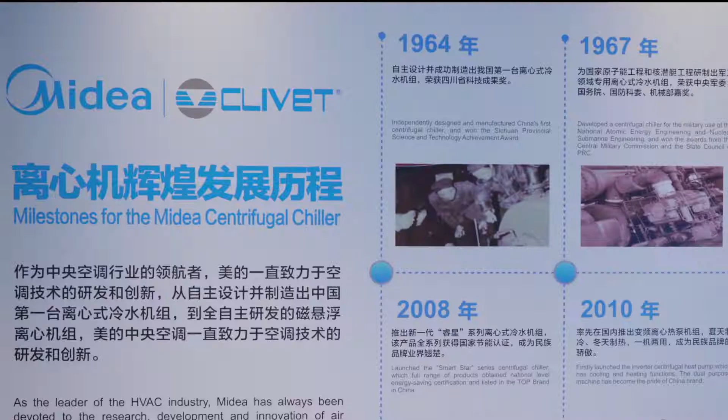In 2004, together with Chongqing General Industrial Group Co. Limited, Midea established Midea Chongqing Chiller Factory, thus fully entered the large tonnage central air conditioning industry. Midea Chongqing Chiller Factory has a military industrial background, with more than 50 years experience in R&D and in manufacturing centrifugal chillers. It has carried out technical cooperation with Hitachi in Japan in the 80s and York in the United States in the 90s, integrating advanced centrifugal technology domestic and international.

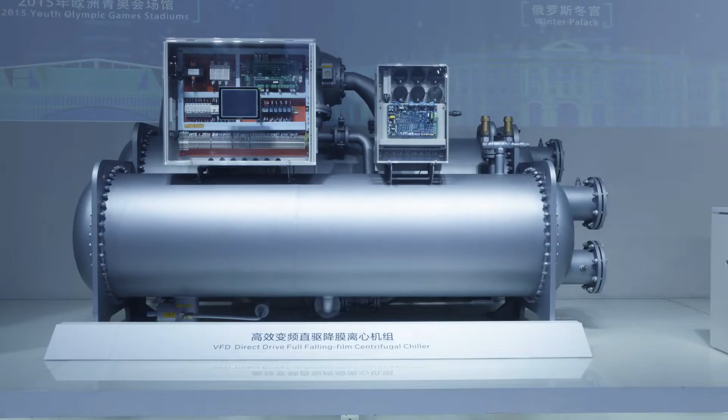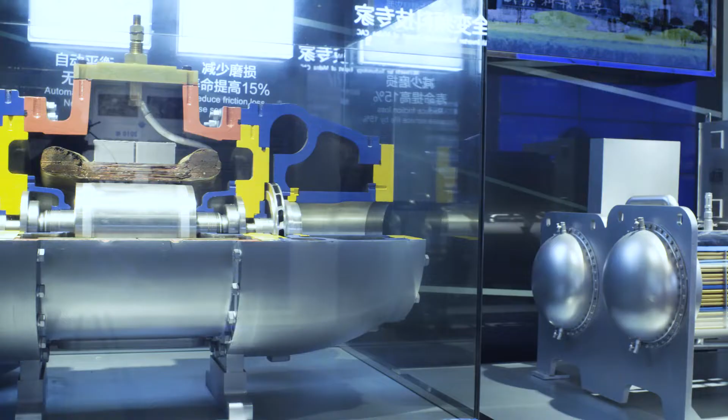After the establishment of Midea Chongqing Chiller Factory, Midea invested a lot of capital and resources in large tonnage chillers. From technology introduction to independent innovation, Midea continues to break through the HVAC industrial technical barriers. In 2013, Midea launched ultra-high efficiency 2-stage centrifugal chillers, leading the COP of centrifugal chillers into the 7.0 era. In 2015, Midea launched Inverter Direct Drive Centrifugal Chiller, breaking through the energy efficiency barrier of the small cooling section. In 2016, Midea acquired the famous Italian chiller manufacturer Clivet, thus expanded its chiller bases to global.

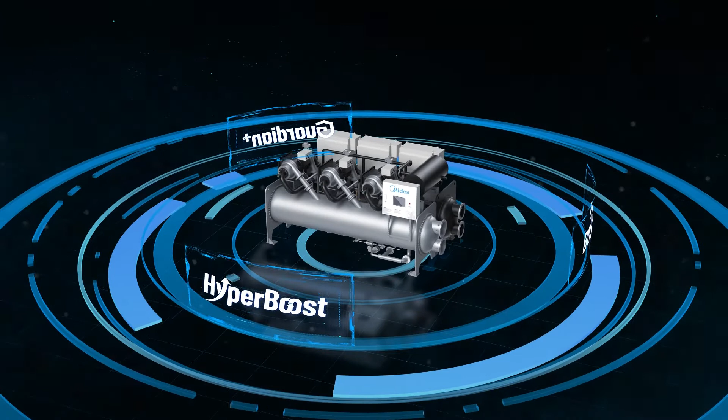In 2019, Midea launched a fully self-developed magnetic centrifugal chiller, breaking the history of core technology monopolized by foreign HVAC manufacturers.

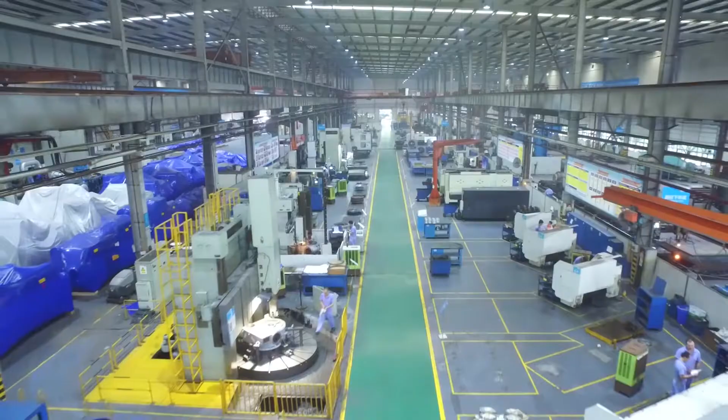So far, Midea Chongqing Chiller Factory is one of the largest chiller production bases in China, with about 800 employees. There are 5 workshops covering an area of 200,000 square meters, which mainly produces centrifugal and screw chillers, and also used as warehouse. Midea insists on independent R&D and manufacturing of core components. It masters core technologies and creates cost-effective products for users.

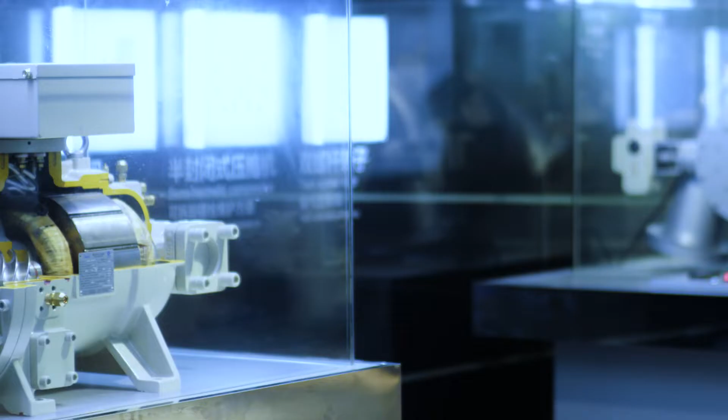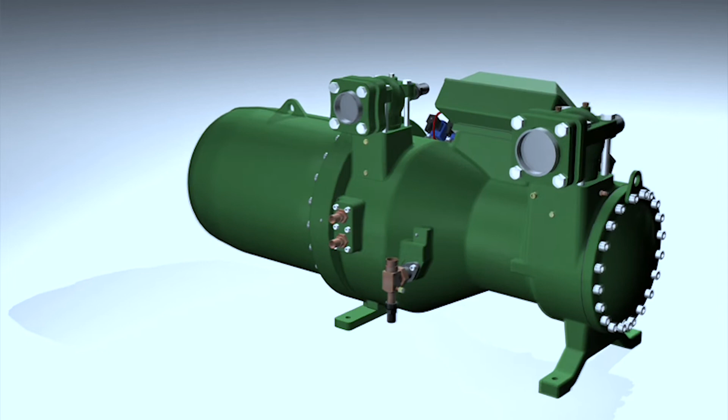The twin-rotor screw compressors increase energy efficiency by 15 to 20% compared to the single-rotor screw compressors. The compressor is equipped with a 3-stage oil separator, featuring high separation efficiency, small pressure drop, and a low oil throwing rate.

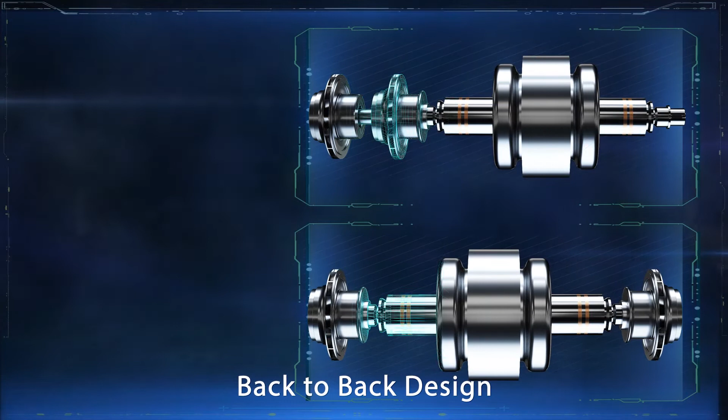One of the highlights of Midea's self-developed inverter direct drive centrifugal compressor and the magnetic centrifugal compressor is the structural design. The 2-stage impeller arranges according to Midea's unique horizontally back-to-back design and is opposed horizontally, which reduces axial force by more than 90% compared to the traditional tandem design, with longer bearing life, better stability, and higher compressor efficiency.

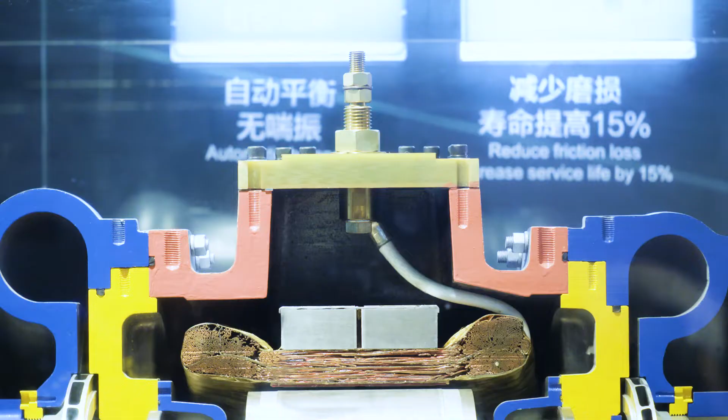With the dual control of operating frequency and the pre-rotation inlet guide vane, it achieves a wider operating range of the compressor. The inverter direct drive centrifugal chiller adopts direct drive technology, eliminating the increasing gear of traditional compressor. With a compact structure and stable operation, it reduces mechanical loss by 4%. No gear high-speed motion, which reduces the noise of the chiller by 5 to 10 dBA.

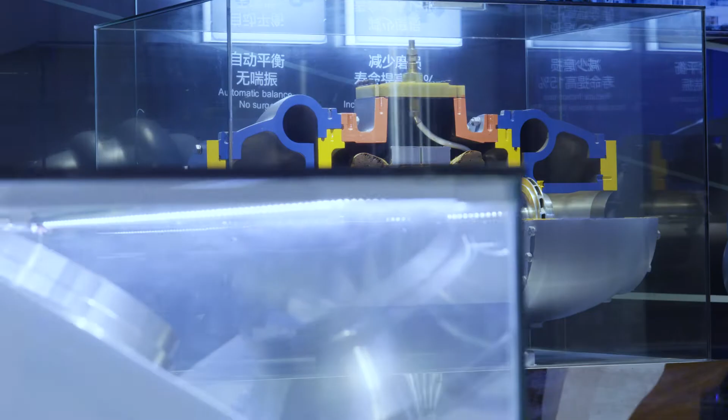Meanwhile, the accuracy of the operation frequency control is up to 0.1 Hz, which can precisely manage the refrigerant flow and improve the control accuracy of water temperature. It also combines with the built-in optimization algorithm, keeping the compressor running efficiently.

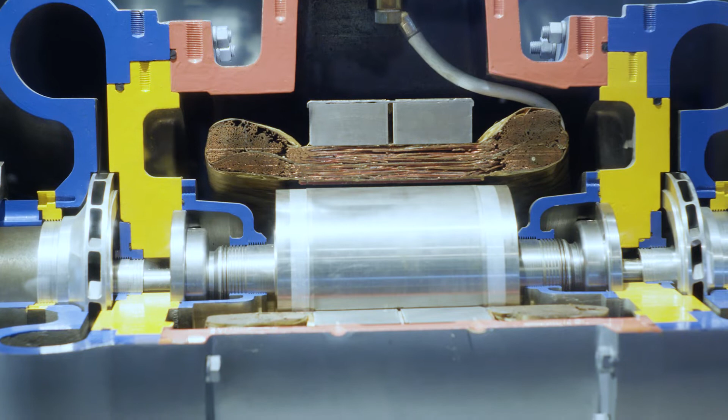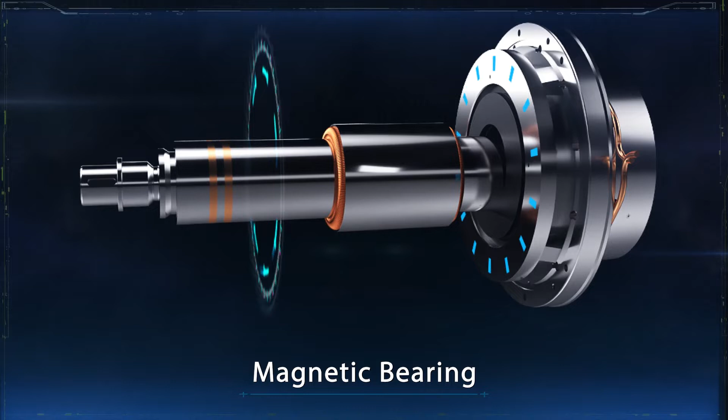The frequency control of the magnetic centrifugal chiller uses an advanced vector control algorithm combined with Midea's self-developed permanent magnet synchronous motor, thus achieving more efficient speed control, making energy regulation more accurate and operating more efficient.

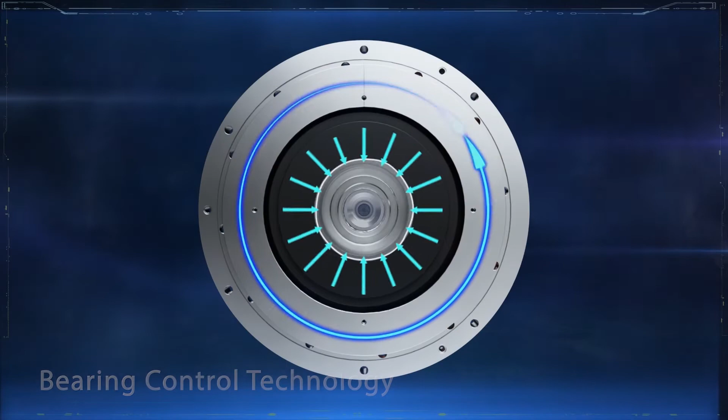Most of the traditional evaporators are flooded type, with a large refrigerant charge and limited evaporation efficiency. Midea's pioneered full-falling film evaporation technology saves about 40% of the refrigerant compared to the traditional flooded type, which makes it advantageous in both energy saving and environmental protection.

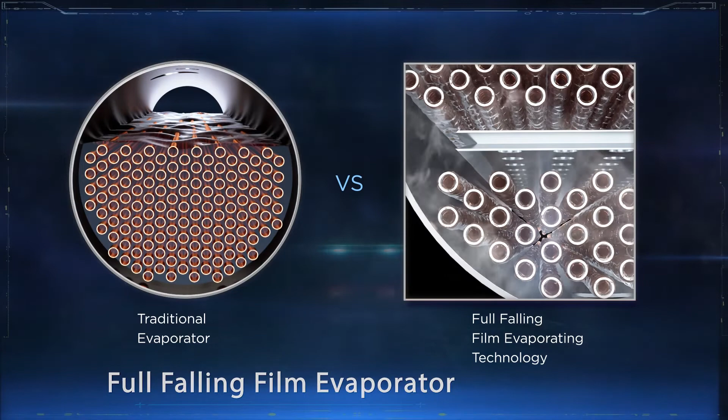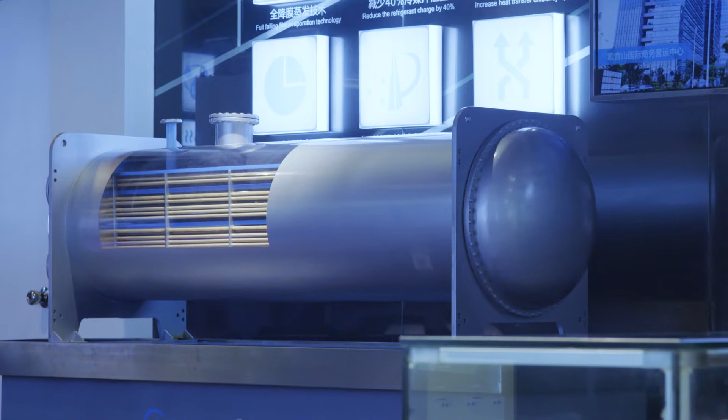Refrigerant is sprayed to form a liquid film on the surface of the high-efficiency heat exchanger tube in the full-falling film evaporator. The heat transfer efficiency is greatly enhanced by about 30% compared with the traditional full liquid type.

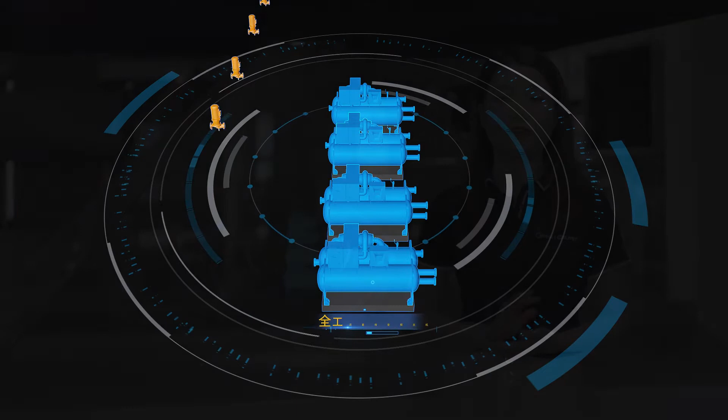This holographic projection shows the application of Midea's technical solution for a high-efficiency machine room at Tianhe Park Metro Station in Guangzhou, China, which is the largest metro station in Asia and is a transfer station for 3 lines. In this project, Midea applied 4 high-efficiency inverter direct drive centrifugal chillers, 4 inverter chilled water pumps, 4 inverter cooling water pumps, and 4 cooling towers, and modular AHUs, FCUs with big temperature difference and low resistance.

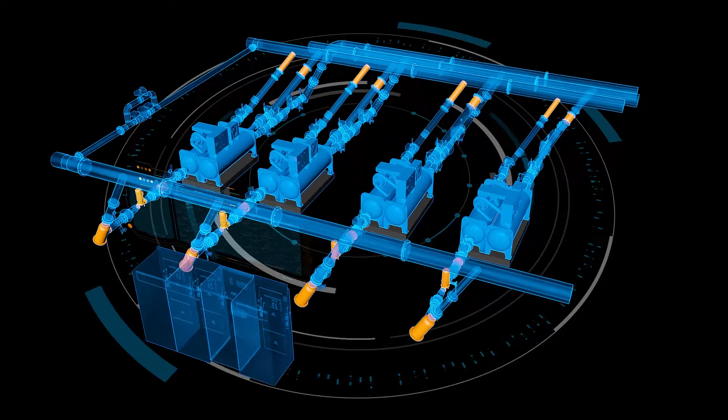Midea HVAC engineers also optimized all the water pipeline connections to reduce pipeline resistance by increasing pipe diameters and using low-resistance valve components. The project uses Midea BMS for all-round intelligent management of the chillers, terminals, and control system. This project has raised the energy efficiency level of China's rail transportation environmental monitoring system to an unprecedented new level, significantly improving the whole life cycle operation efficiency and driving technical progress across the industry, with a comprehensive energy efficiency of over 6.0 throughout the year.

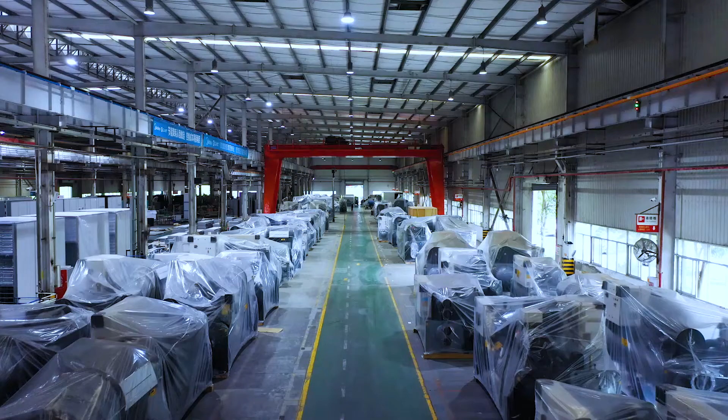Midea has more than 50 years of experience in developing and manufacturing centrifugal chillers. In 2021, there will be more than 1,000 centrifugal chillers produced by Midea to provide comfortable environments for different projects around the world.

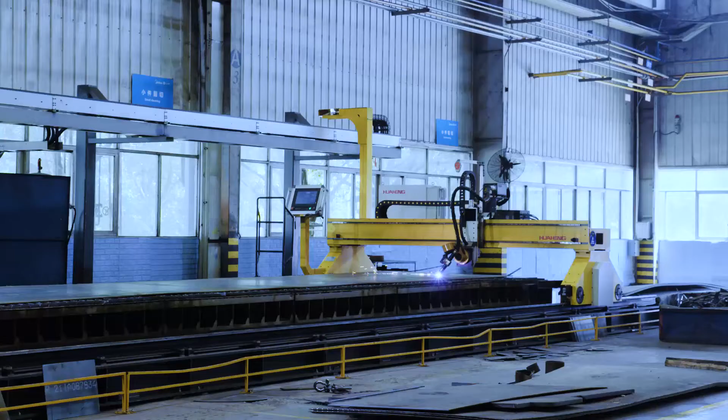This process will be automatically identified by the equipment according to the program instructions, and the cutting accuracy will be as close as 1 millimeter.

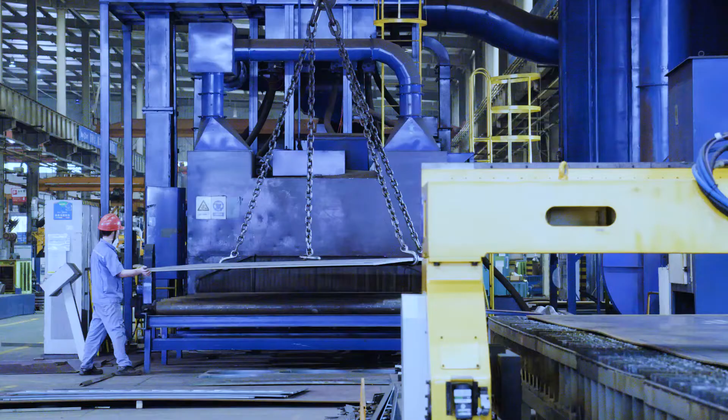This is needed to carry out shot blasting treatment on the steel plates. In order to obtain better welding quality, the high-speed, repeated impact of shot blasting is used to clean the stains and rust on the surface of the steel plates.

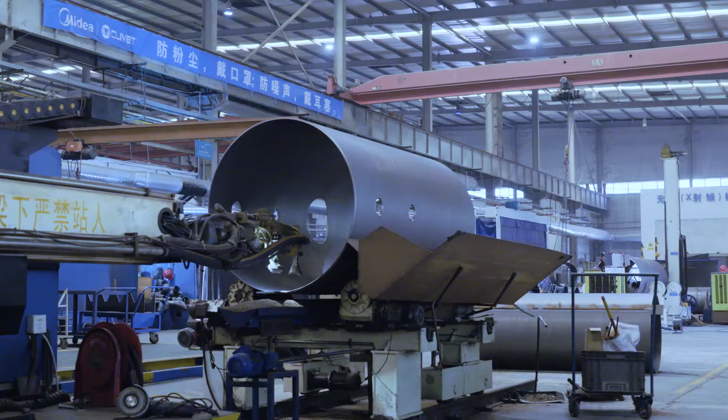After shot blasting, the steel plate will then be rolled into a cylinder under the great pressure of the plate rolling machine. This ordinary steel plate begins to now have the rudiment of a pressure vessel. It will be further formed in the automatic submerged arc welding machine. All welds will be non-destructively inspected to ensure weld quality.

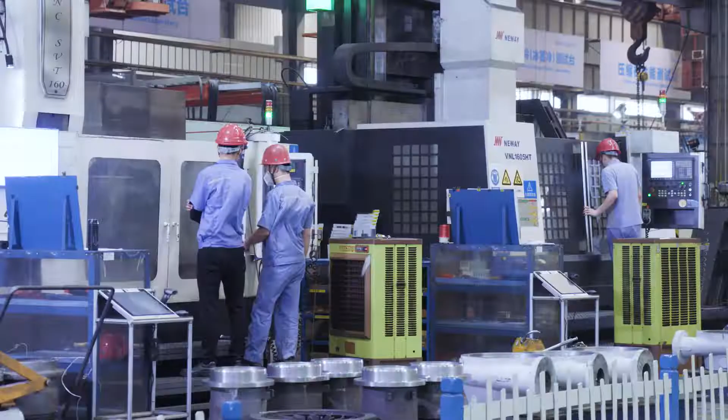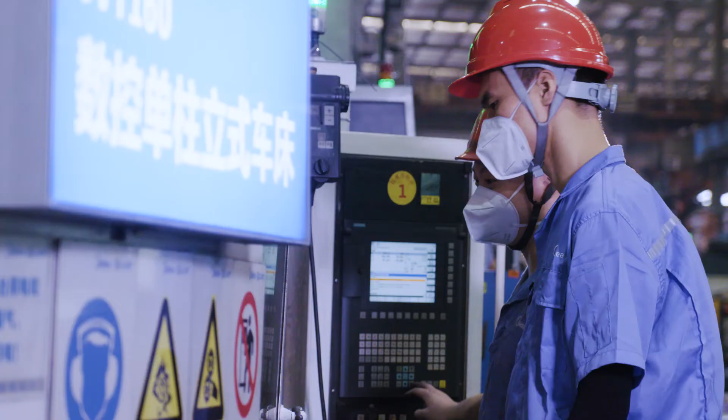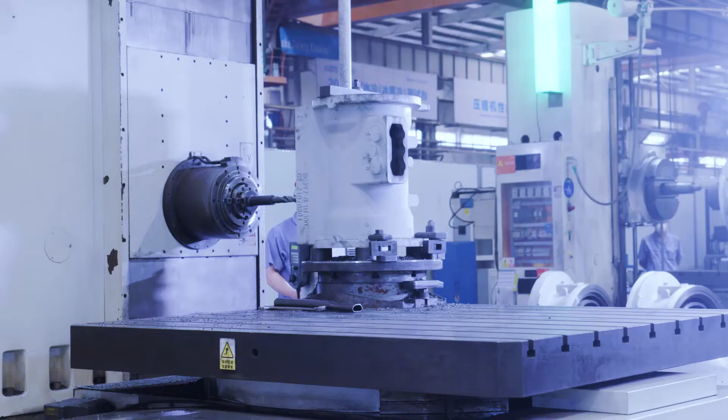The grade of tolerance could reach IT04. The surface roughness can reach 0.8, in order to guarantee the assembly accuracy. We have adopted the advanced coordinate measuring machine from the German company Zeiss to measure and analyze the size and shape of key components like gears, motor shafts, impellers, bearings, and sealing parts. The measurement accuracy can reach 0.001 mm, which ensures the manufacturing of high-quality products.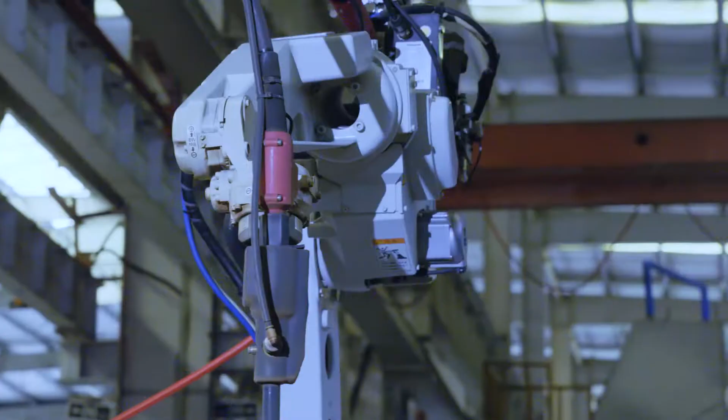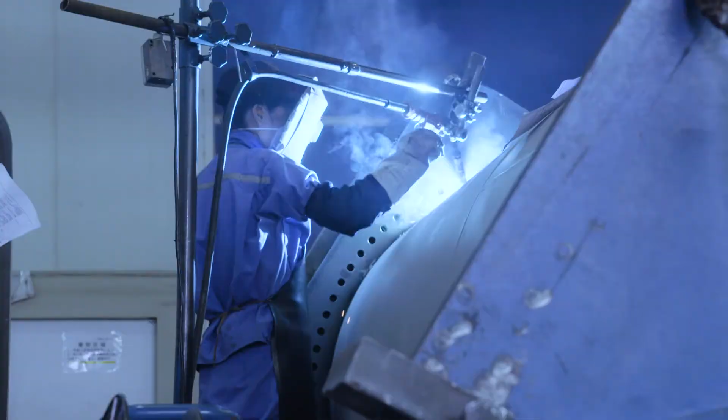Then the welded pressure cylinder will be transferred here. First, the inner parts, like the falling film distributor or supporting parts, will be installed, and the two ends will be sealed with a tube sheet.

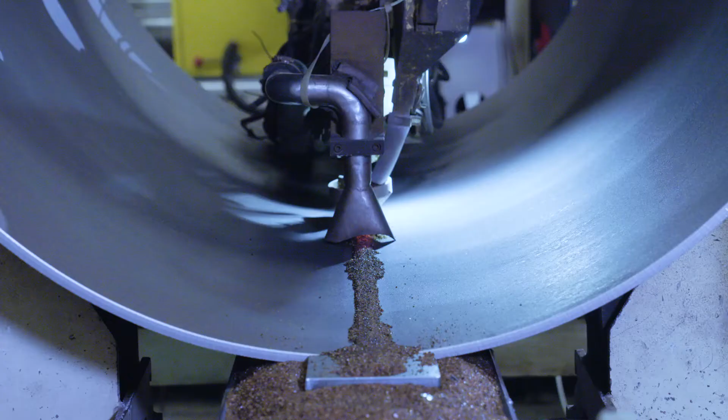A large amount of heat needs to be dissipated during the welding process to prevent thermal deformation. So the welding tooling invented by Midea engineers has been adopted. Such small but very useful innovations can be found everywhere in our plant.

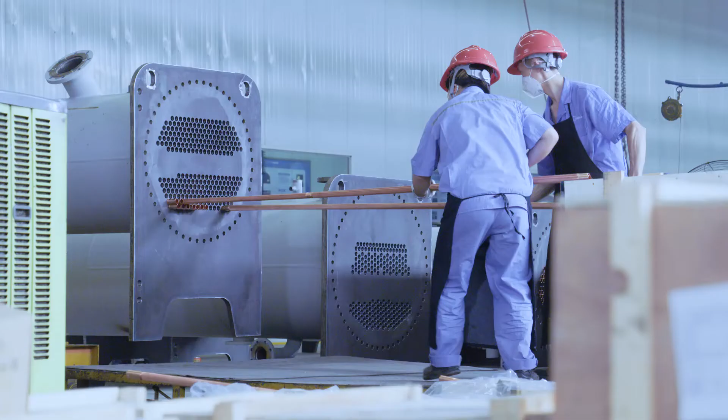Next, the copper tubes will be installed and then expanded at both ends to ensure a reliable interference fit between the copper tubes and the tube sheets.

After the vessels are manufactured, water pressure testing will be conducted at a higher pressure to ensure there's no vessel leakage. The testing pressure value varies with the pressure vessel model. Take the ASME code for example: this vessel will be tested under 1.43 times the design pressure.

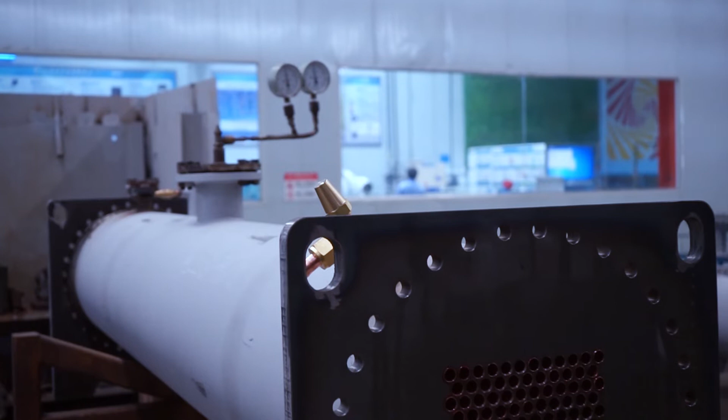As for the compressor, the pressure-bearing parts will go through a hydrostatic test with 1.5 times the design pressure. After assembly, the whole compressor will be tested again with 1.2 times design pressure to ensure its airtightness.

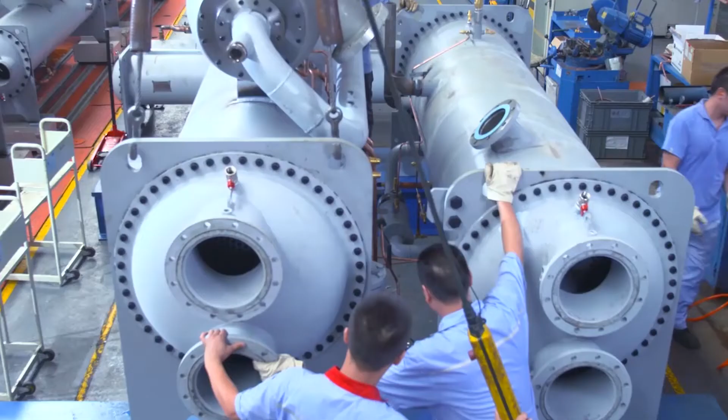On the final assembly line, the vessels, compressors, and pipelines will be assembled together. All the outsourced key components of the chillers are supplied by leading suppliers in the HVAC industry, like Danfoss, Siemens, and Schneider.

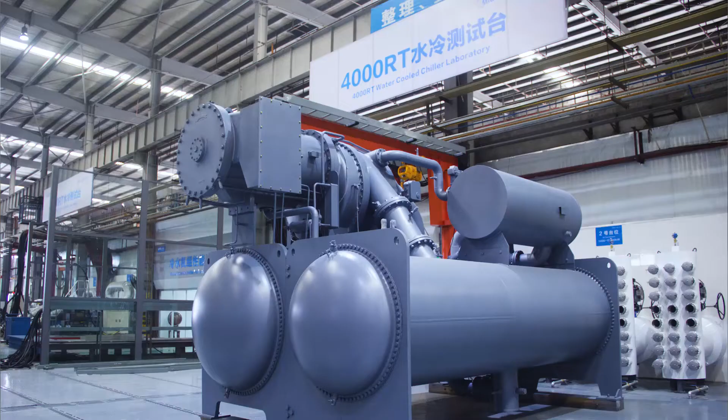This chiller laboratory, with a testing capacity of up to 4,000 RT, adopts industry-leading measurement and control technologies. It can be used for super large tonnage chillers.

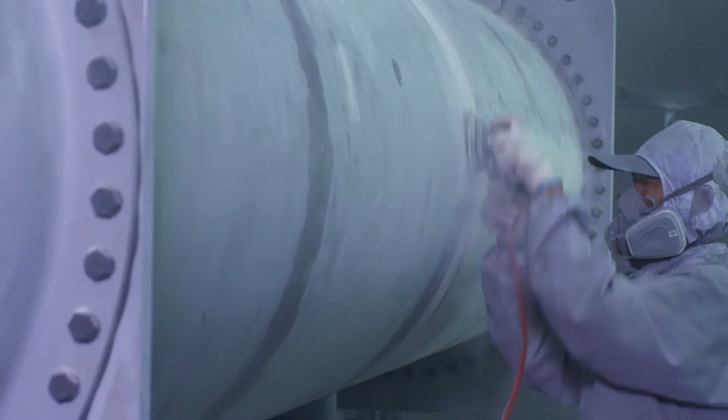After strict quality inspection and testing, the chiller will be painted. The evaporator, suction pipe, and other low-temperature parts will be insulated. Then the centrifugal chiller is ready for shipment and delivered to the customer.

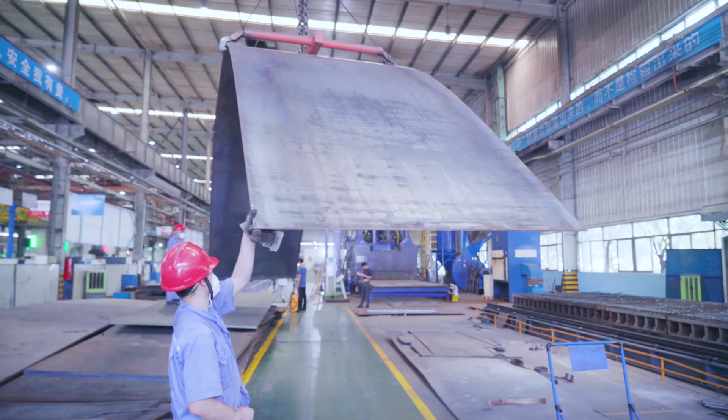Now we are in the workshop which specializes in producing screw chillers, both water-cooled and air-cooled. It is composed of 4 parts: blanking cold working area, container assembly area, unit assembly area, and thermal insulation packaging area. The annual capacity of screw chillers is 4,500.

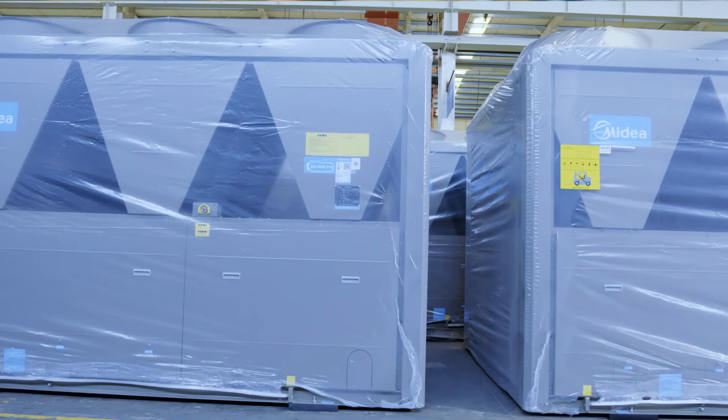At present, Midea has become a leading brand of screw chillers. Whether water-cooled or air-cooled, the sales volume has been ranked first among Chinese brands for many years. Screw chillers are widely used because of their unique characteristics. The global market volume of screw chillers is over 50,000 units every year.

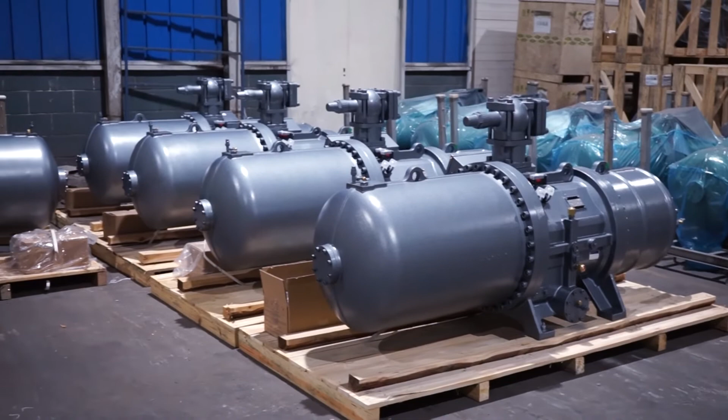Let's look around the production process of water-cooled screw chillers first. Here is the inventory area of screw compressors. These compressors are specifically supplied to Midea based on Midea's design requirements, and are 100% inspected before they are used.

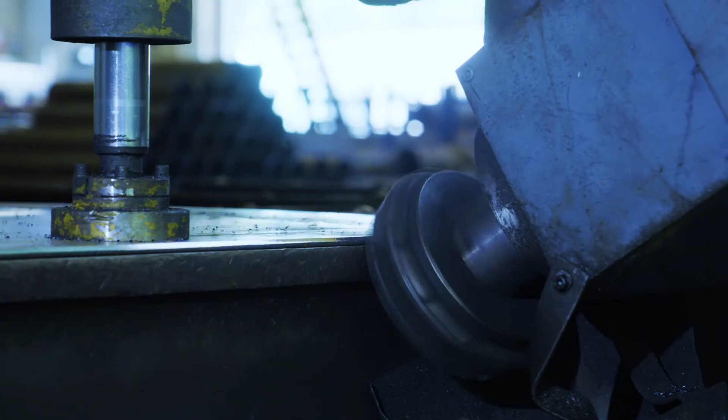Making a screw chiller starts from cutting the steel plates with a plasma cutter according to its specific vessel size. It is needed to carry out shot blasting treatment on the steel plates.

In order to obtain better welding quality, the high-speed repeated impact of shot blasting is used to clean the stains and rust on the surface of the steel plates. After shot blasting, the steel plates will be rolled into a cylinder under the great pressure of the plate rolling machine. This ordinary steel plate begins to have the rudiment of the pressure vessel.

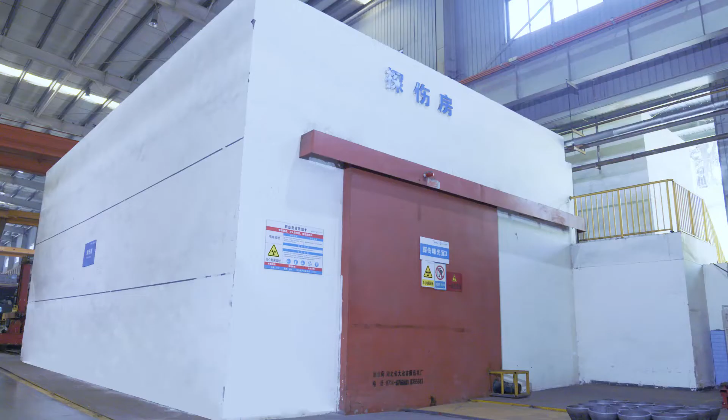The fixed support ensures that the shell will not deform due to thermal expansion or cold contraction during welding. The rudiment of pressure cooler will be further formed in the automatic submerged arc welding machine. Then all these coolers will be X-ray inspected to make sure each cooler will be qualified.

Painting is necessary to protect the shell from corrosion. The thickness of the painting must meet the requirements of the related standards.

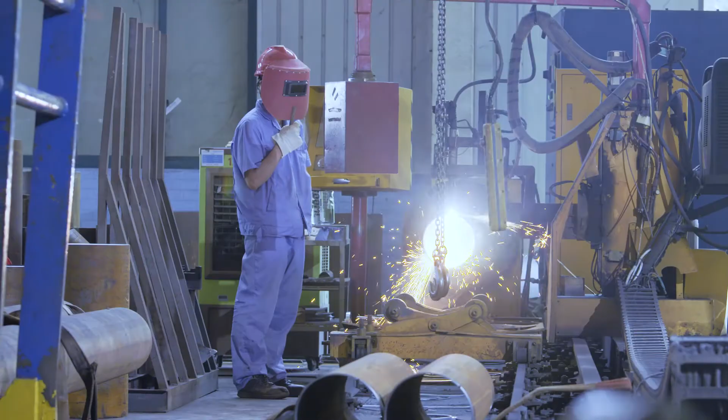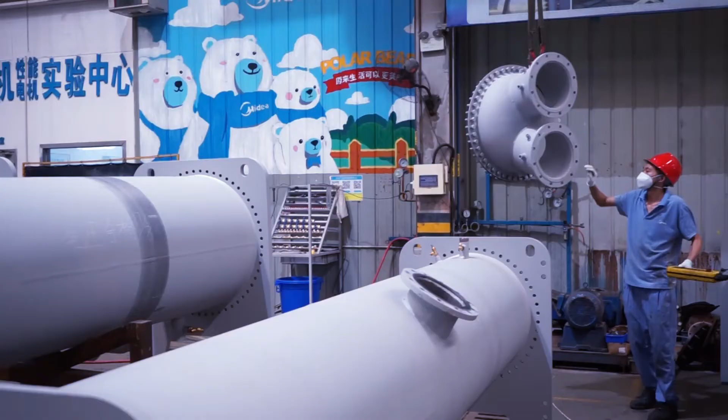The tube support plate is to enforce the strength of the tubes in the vessels. The tubes are then cut to different sizes and await the next process. The vessel and other parts are all coming together now. Special copper tubes are inserted and the baffle is completed. End plates are installed with one side being closed and the other with a cell head attached.

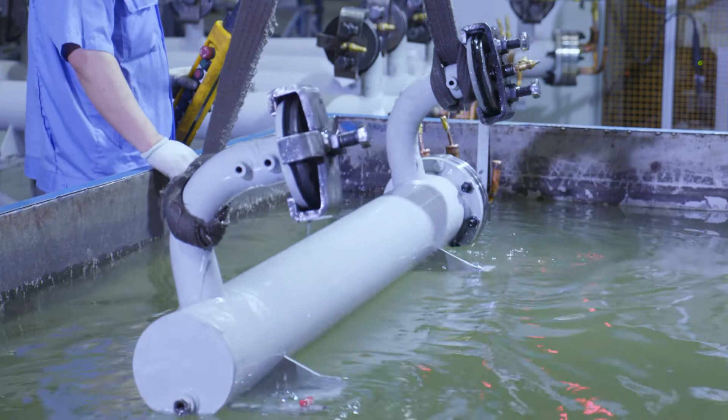After the coolers are manufactured, a pressure test will be conducted at a higher pressure to ensure there is no leakage. The value of testing pressure varies with the cooler model. Take the ASME standard for example: the coolers will be tested under 1.43 times of the design pressure.

As for the compressor, the pressure bearing parts will go through a hydrostatic test with 1.5 times of design pressure. After the assembly, the whole compressor will be tested again with 1.2 times design pressure to ensure its air tightness.

The evaporator and condenser are then bolted together. Copper tubing is installed and is in place, forming an airtight fit, which is tested by inserting nitrogen and checked with the nitrogen sniffer for leaks.

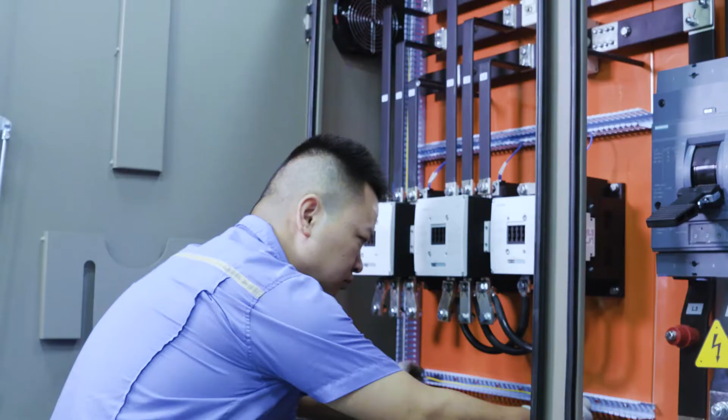Here is the assembly of the electrical control box. The PCB is made by Midea, with the other key components, like the contactor and the relay, outsourced from ABB, Schneider, or Siemens. Now let's come to the final assembly line.

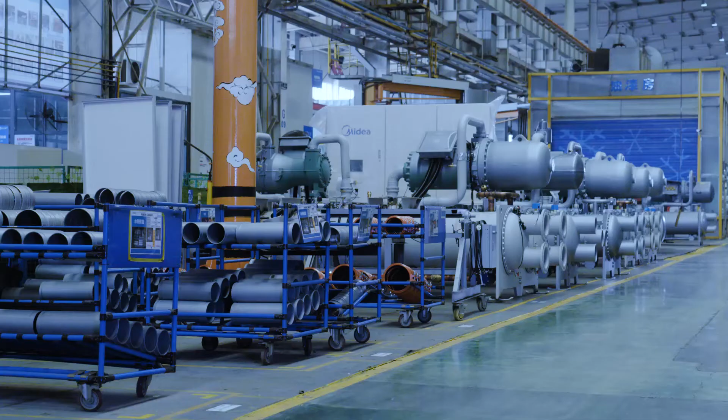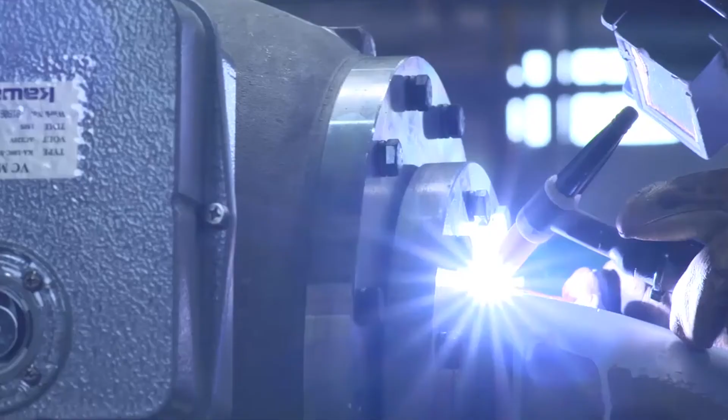The compressor is installed. The flange and the discharge pipes are fabricated and welded into place. Copper pipes connect the evaporator, the condenser, sensors, valves, and power cables are wired to the control box.

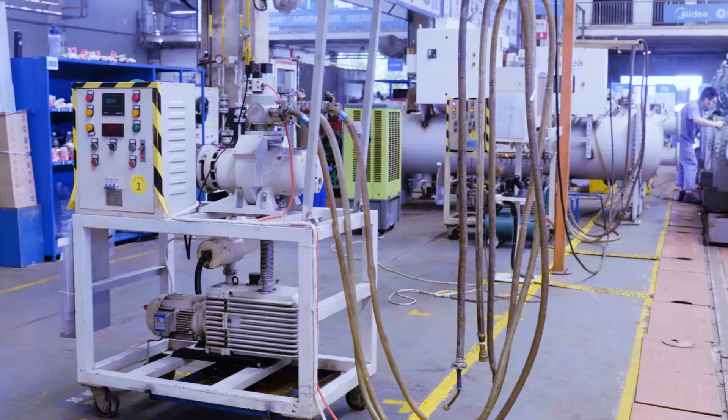After the assembly is finished, we will carry out the first leak detection of the whole chiller. The tester will fill nitrogen of 1.5 megapascal to use the high precision leak detector to detect each welding point and the flange to ensure there is no leakage.

Then the refrigerant will be charged and the halogen gas leak test will be carried out to ensure the leakage value is less than 2 grams per year.

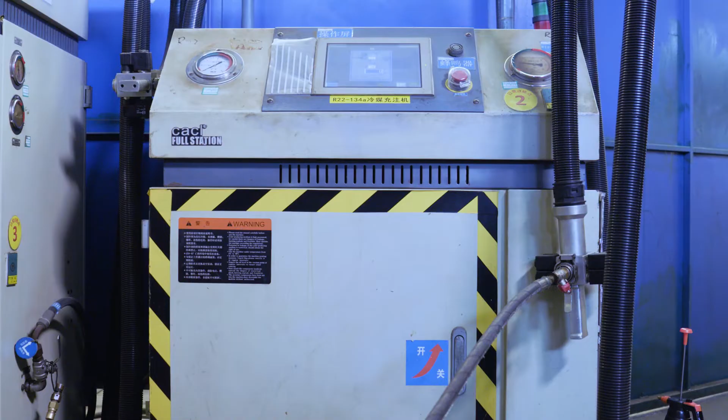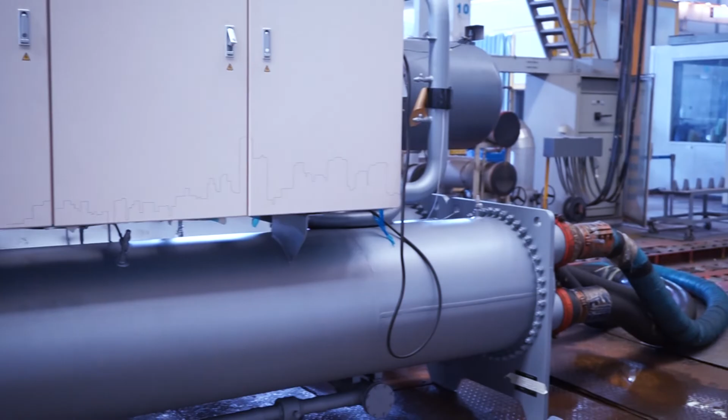Next, the unit comes to online lab, which is AHRI certified. It can simulate different working conditions based on client demands. Testing data of each unit will be recorded into a database, which can be traced by a QR code.

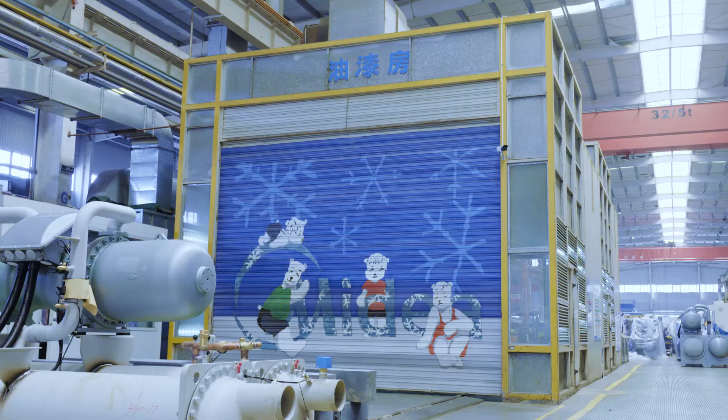The unit will then be cleaned, dried, and painted. The last step is the installation. Now, the unit is ready for shipment.

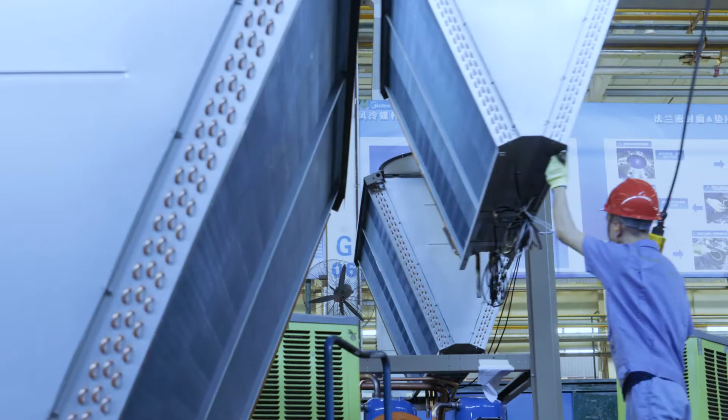Let's see how Midea makes air-cooled screw chillers. In fact, the main difference between air-cooled screw chillers and water-cooled screw chillers is the condenser. As the condenser uses air to cool the refrigerant, at the same capacity, the size of the air-cooled chiller will be much bigger than the water-cooled chiller.

Here's the start of how we make the air-cooled screw chiller. We can see how the coil is made. These special copper pipes will put these aluminum foils together.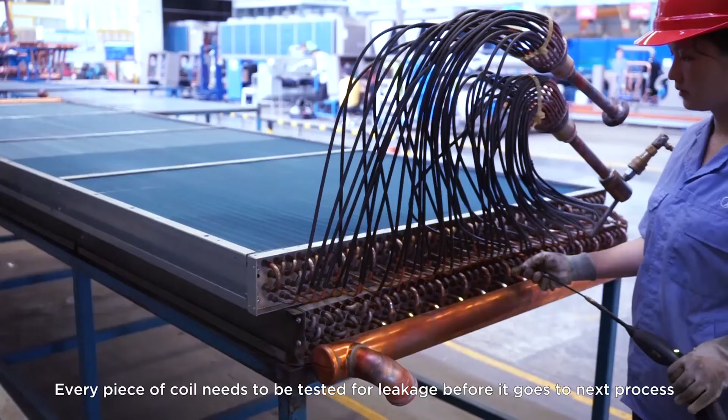Now these pieces of coil are welded together to form a big heat exchanger. The last step is to assemble the fan. Then the condenser is ready.

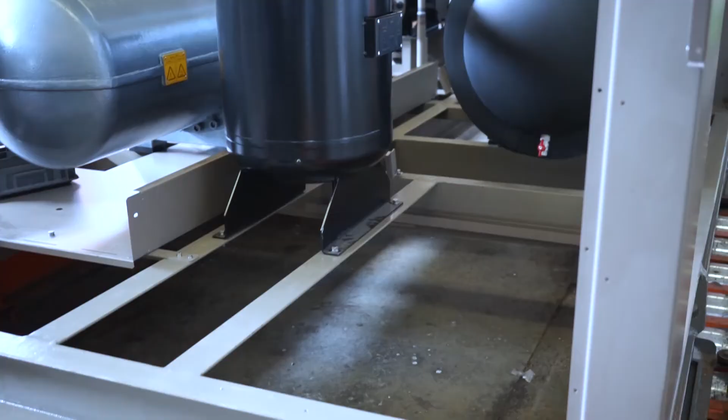The whole assembly process of an air-cooled screw chiller is the same as a water-cooled screw chiller.

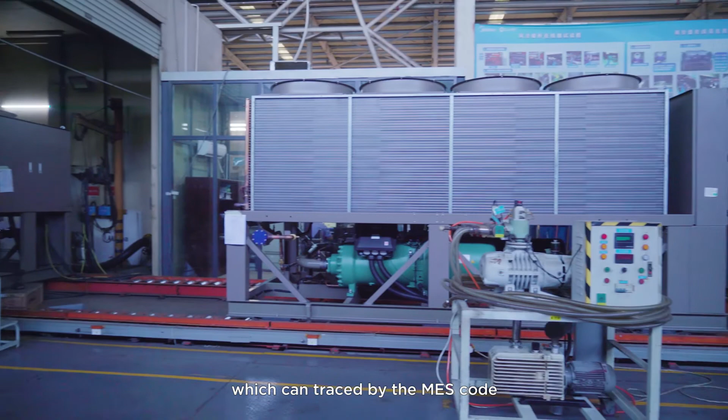Now the air chiller is ready for shipment.

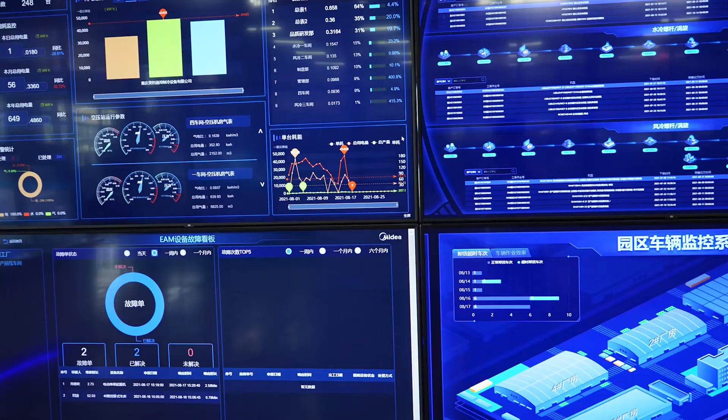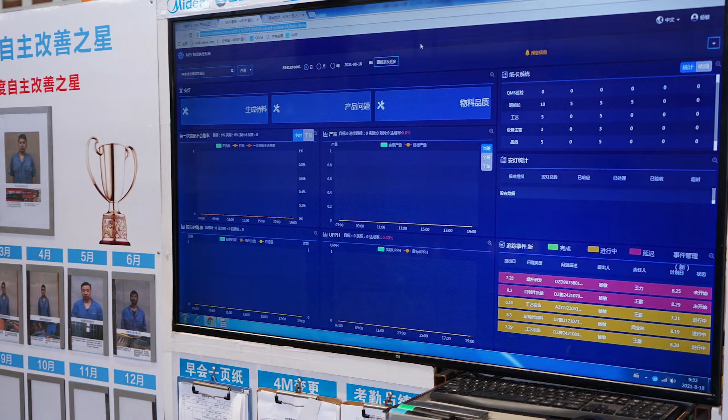As information technology evolves, there are more and more possibilities to improve our factory processes and operation speed. So we have carried out a manufacturing execution system two years ago. It helps us to understand the production process better with more data, and we can get messages in real time once something unexpected happens during our production and logistics processes. Getting benefits from this, we make production flow smoothly and faster, leading to higher productivity. We can also monitor our factory energy consumption every single hour. In this way, we believe we can offer better products and services to our global customers.

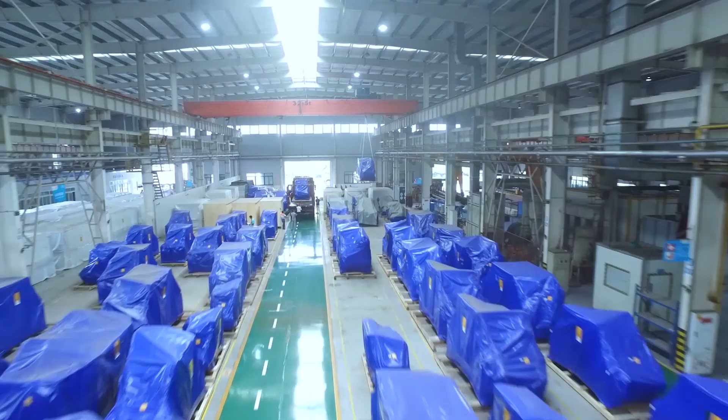These large units are shipped all over the world, so they are carefully crated, shrink-wrapped, and labeled. Every unit that leaves this factory floor is proudly labeled with the words, "Made in Midea, Chongqing Chiller Factory."